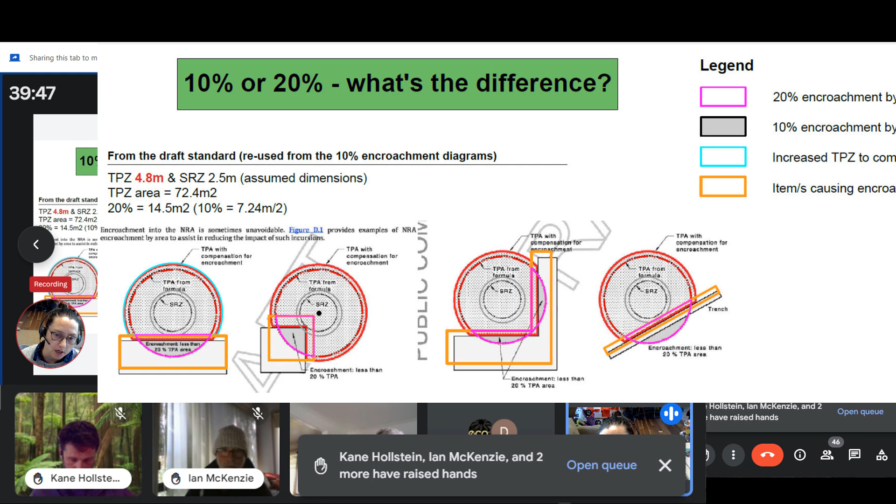And again, similarly with the trench, that's against the structural root zone, but considered minor. We've got several other people with their hands up - I think Kane was first.

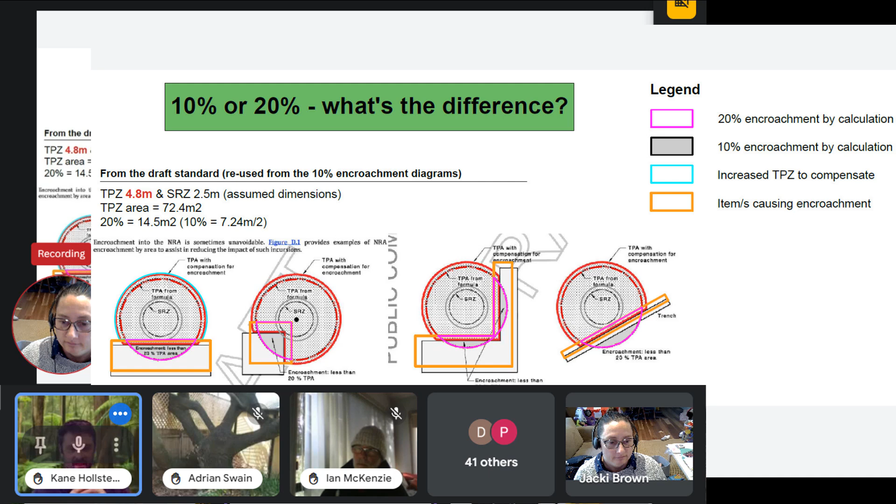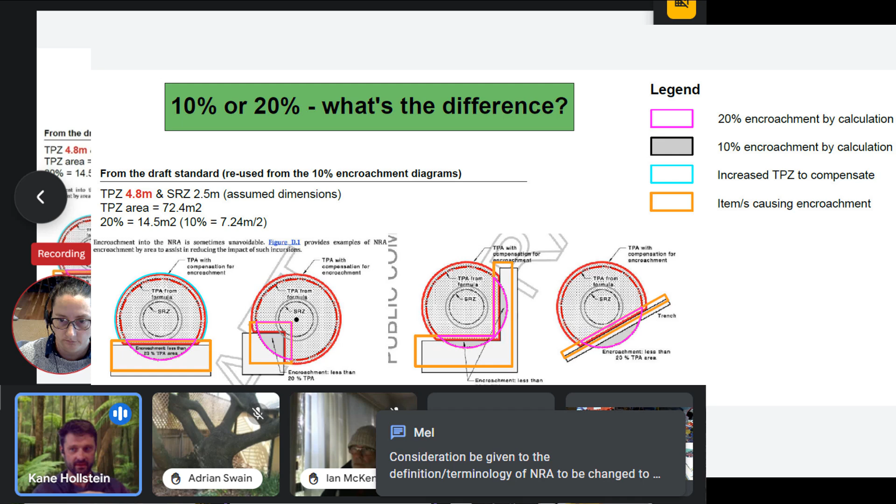Yeah, just wanted to say that I think the NRA, whatever we're calling it now, ultimately captures the nominal root area quite well. It's just a circle on a plan, and that doesn't actually mean a lot for city trees or anything in an urban environment, to be fair. It's an easy way out for us to be able to calculate that based on an area.

But as Peter and a few others have mentioned, it doesn't account for where the roots actually are. So 20%, 30%, 40%, 50, 60 - for a tree in an urban environment growing in a planted pit, that 10% is kind of irrelevant, or 20%. We're probably talking about it growing in a 10% volume. So it is on a case-by-case basis.

I think, falling back on what we heard from Shine there, it's perhaps a rewriting of triggering points in planning documents, or other levers that should probably be pulled in that context.

And just on that as well, there are some interesting tools out of America that don't use a nominal root area, but apply a circular area in a space and then map out other areas to subtract from the 10%, to see what you're left with. So if you have building footprints and that type of thing, you can actually visualize where the roots are likely to be on that basis. Interesting things in this space too.

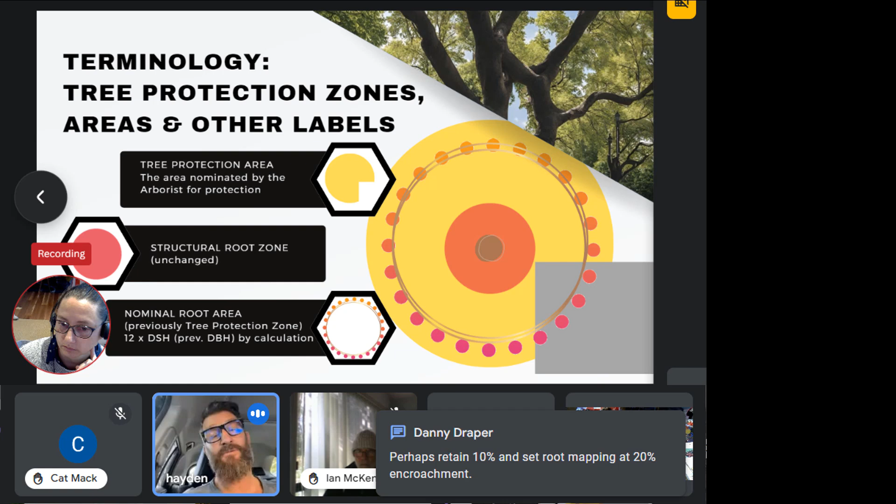Maybe the council or initiation point is 10%, and an acceptable range is up to 20%. That's the key - it's an acceptable range depending on species and the type of development. So my point earlier wasn't that we should go for it and move it, I'm just saying it's possible. One thing I don't like is this ridiculous root mapping after 10%, which doesn't seem to be regulated in any way and has no real point or purpose. Anyway, it's a good discussion with some really great points, and I'm glad we're having it.

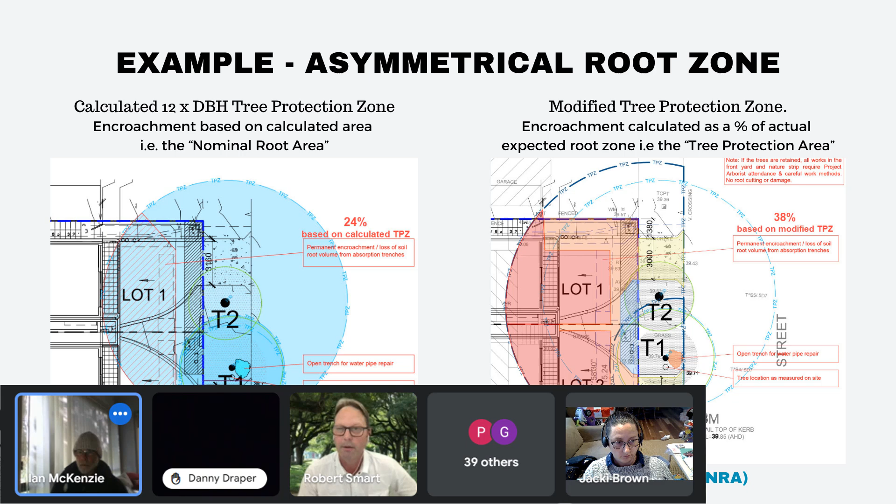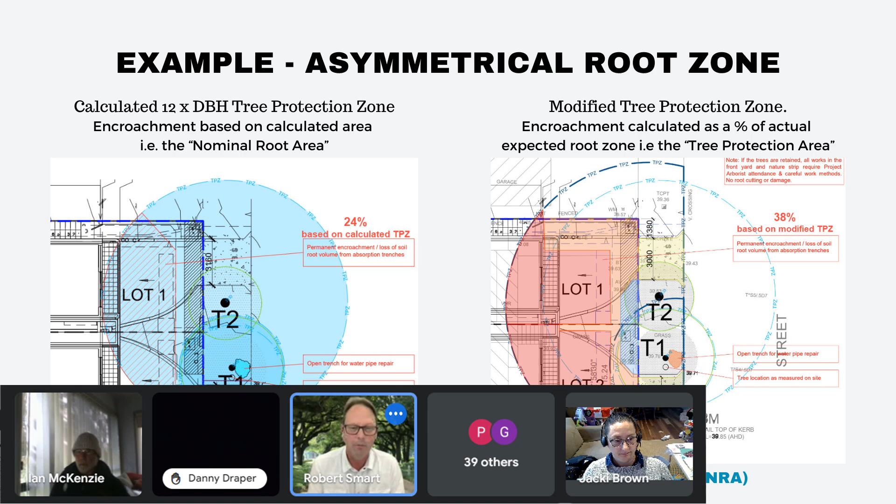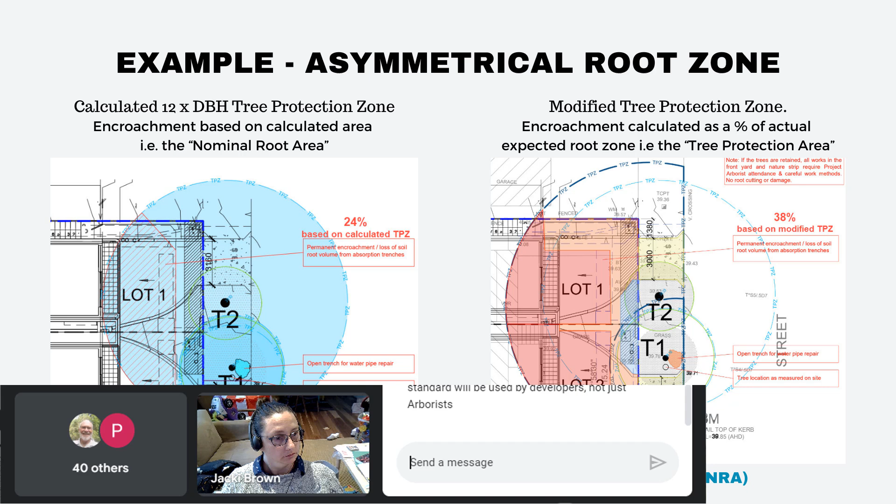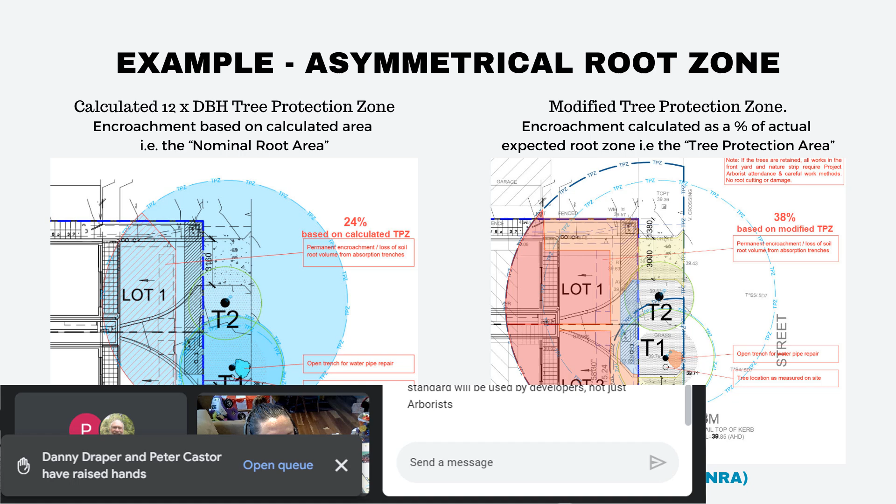Having this really simple one definition is missing the point of this grey area. It's a bit like QTRA - you have broadly acceptable at one end, wildly unacceptable at the other, and the value of QTRA is applying all the measures and checks and balances for that middle area. I think the standard misses what needs to happen in this middle area, and that it should be a range. I've always had a problem that people start giving you grief over a 12% incursion versus a 10% incursion.

And it should be that you are listened to as an arborist when you're arguing with council officers or whatever, where they say 12% is over the allowable amount. Well, then there should be something in the standard that starts to really convey that there's this middle ground where arborists need to be involved and make judgment calls.

Thanks, Rob. Definitely agree. There's the value that comes from arborists is to apply their knowledge to figure out that grey area.

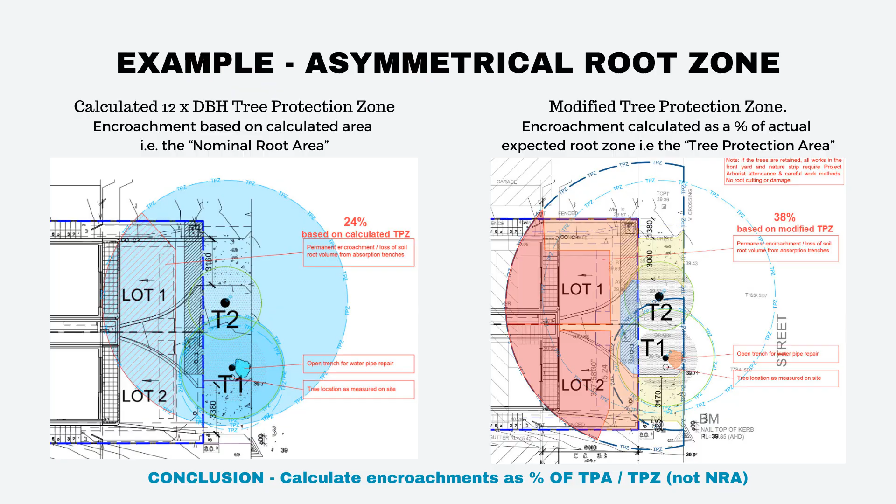There have been a couple of suggested ways of doing that - from Greg Moore at TreeNet in 2018, which was only 9 years after the standard, and Guy Prosin, our honorary life member, has his method that he's used for many years. So, ranges of defining the ranges of encroachments: less than 10%, 10 to 20, 20 to 30, and over 30 is Greg Moore's suggestion, with some guidance around what happens at those trigger points. Guy Prosin has just given them names to refer to, and I think he gives more definition about what those names refer to.

Was there anything else on that point before I move on?

Can I just say that those percentages relate to nominal root areas, not actual. Yes, that's where it gets confused.

Where you've got a complicated site that's built out on 3 sides, you'll never comply with even 35% if you're going to try and retain a large tree. So maybe go back to your previous slide and talk us through the difference between notional and actual, and where you end up with the percentages.

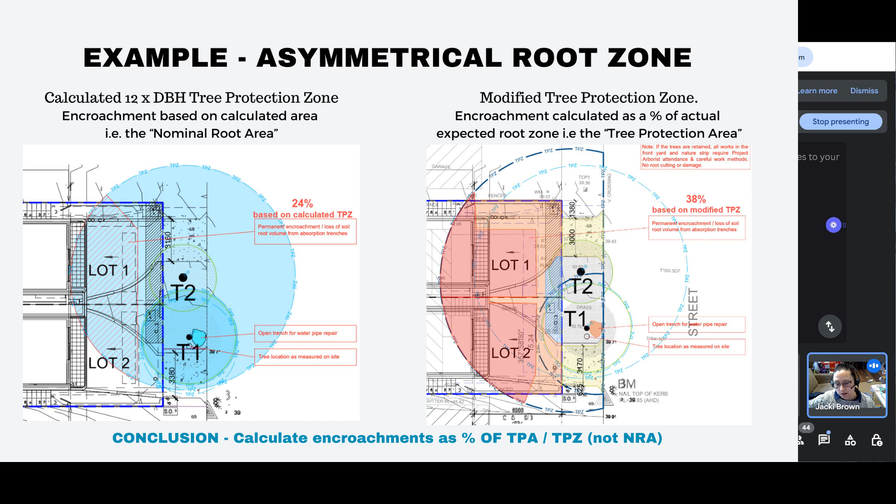So I did a bit of a comparison to the other standards around the world. Didn't get a chance to look at the European ones - I think they've recently been preparing standards, but they're not available yet. The US has the ANSI, and I believe the BMP from ISA feeds into that. I've only got access to the BMP at the moment, so that's what I've reviewed.

And then the British standard - one of the points I noticed was that the draft standard now doesn't reference the British standard, but it seems like there's still quite a lot of overlap, and our standard is probably quite closely aligned with the British standard. I'm not sure why that was discussed, I can't quite recall the reasoning why we would drop that. Maybe it's because things have moved on, but I agree that our standard does mirror the British more than any of the others. So maybe that can be put back in the referenced documents, but it was discussed that we would drop that out - so maybe it should go back in.

And I know that the British standard was updated 3 years after our original standard, so there might be some updated information in that one since ours was created. They also did a public exhibition in 2022, but that doesn't seem to have gone far, or I can't find any information about it.